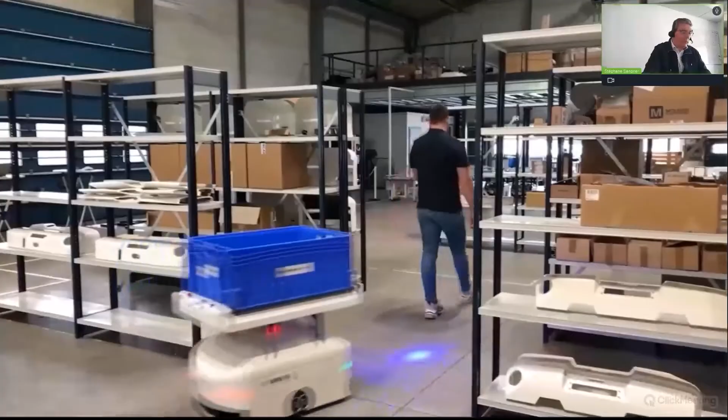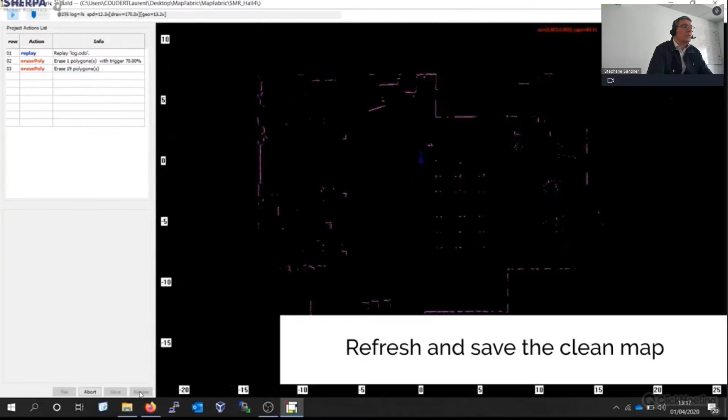The Sherpa field engineers, when starting any installation at the customer site, begin the mapping with the follow-me mode. As you saw in the video at the beginning, the operator just took the robot with him, picking it up and bringing it to any operation, driving it through the aisles to record the map. Based on scanners on the robots, we can easily capture the surroundings of the customer.

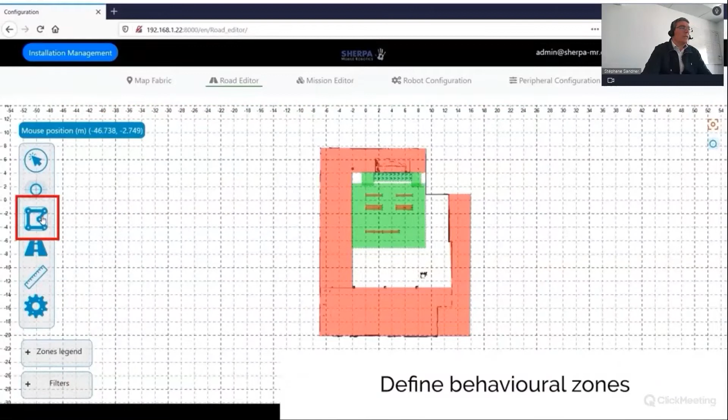After that, with very easy tools, the customer can program his routes and zones where he allows the automatic mobile robots to move and drive. Here, for example, everything in green shows exactly where we allow the robot to drive. In red, we drag in zones where the robot is not allowed to drive, where we forbid it. So everything is on very easy graphical tools - just pick any kind of module or icon, draw it, and put in all the behavior you'd like to give your installation. It's very easy to use.

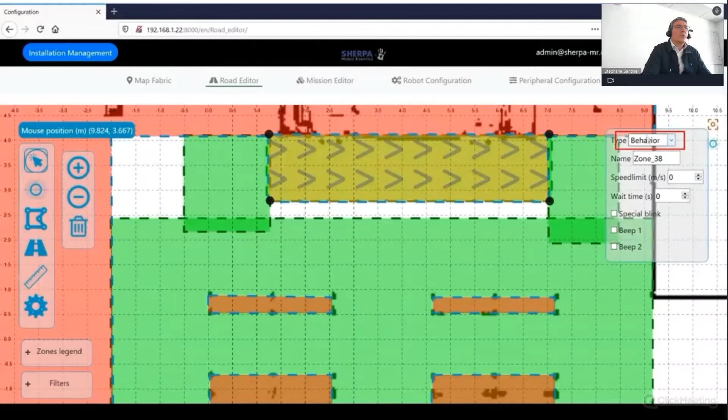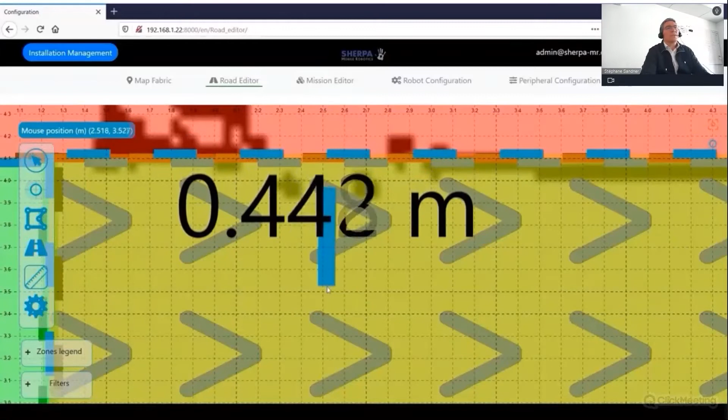There is no program line to code. Everything is done in a graphical mode. So the customer doesn't need to have very good, very well trained experts in robotics or in software development to drive or to set up any installation. We also have measuring tools, and at the end, the road editor also gives some possibilities to put pick and drop points so the robot can follow and reach any destination in autonomous mode.

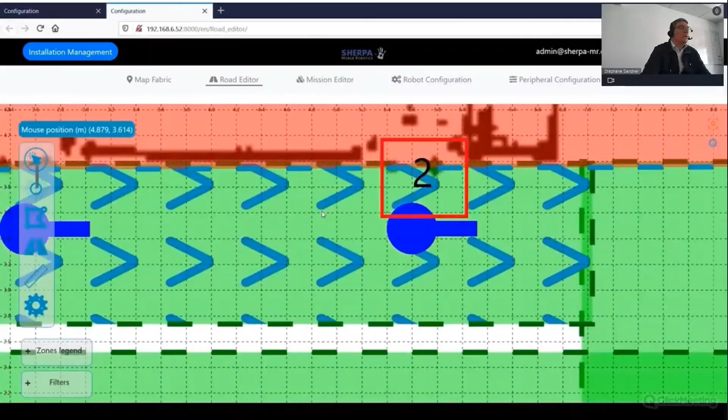The same easy drag and drop system will be used, in fact, to program the mission. So there is no need to set up any code line to program an installation. You just drag and drop the modules. You configure the roadmap before any mission and any pick and drop missions.

So the follow me mode and the full autonomous driving mode are standard functions on all Sherpa robots. The combination of both helps companies to reduce pain, but also to increase productivity. The following video will show a real application in an engine manufacturing facility in northeast France. We will show you with five simple interactions between humans and robots how this cooperation is driven.

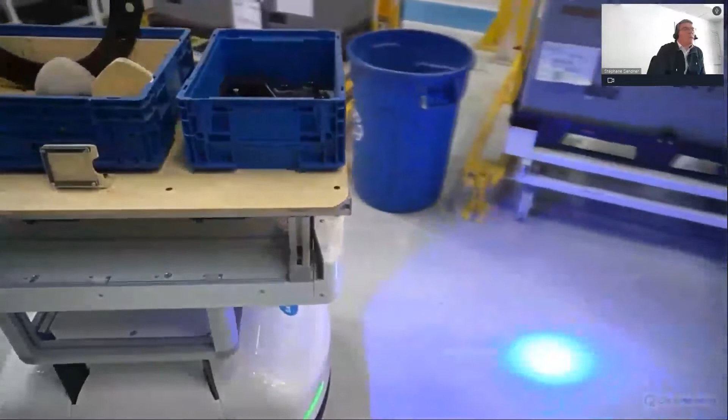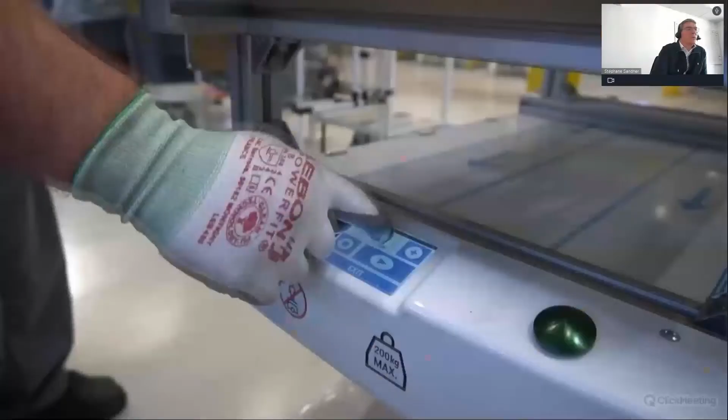So first of all, the worker picks up all his parts based on the follow me mode. So the robot follows him. He has a certain list of parts to pick in order to prepare the kit that will be sent later on to the assembly line. After this has been done, the robot drives to the final kitting station, where the operator also uses the robot as a workbench to finish the process and to prepare the parts that will be ready to be assembled on the borderline. The third component is the full cooperation between operators on the assembly line and the robot itself.

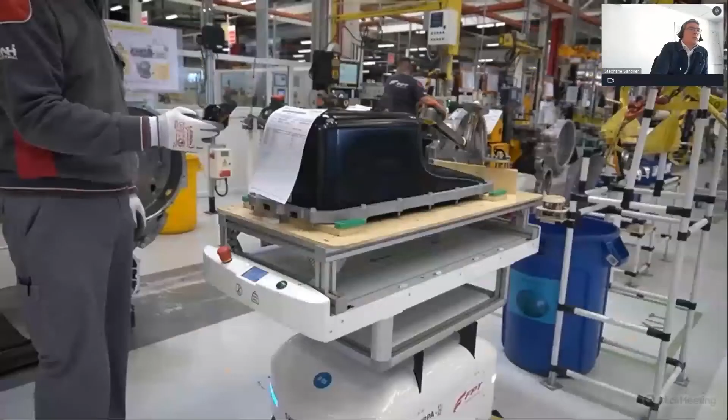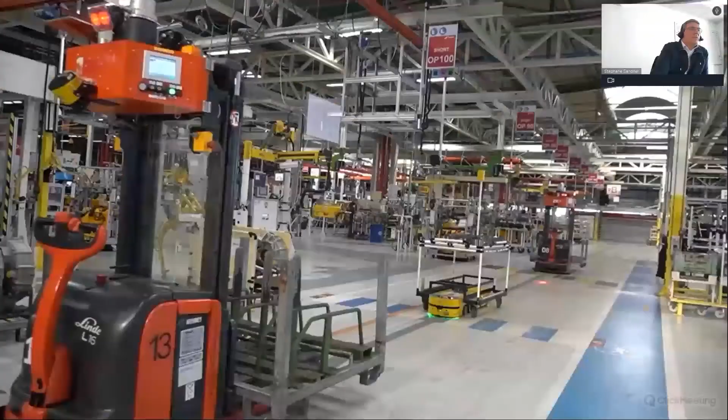So the fourth function is the cooperation between robots and other robots on the line. So we have full communication with other automated guided vehicles driving in this system. So we have here the example of full cooperation and collaboration between humans and machines, as well as other driving vehicles.

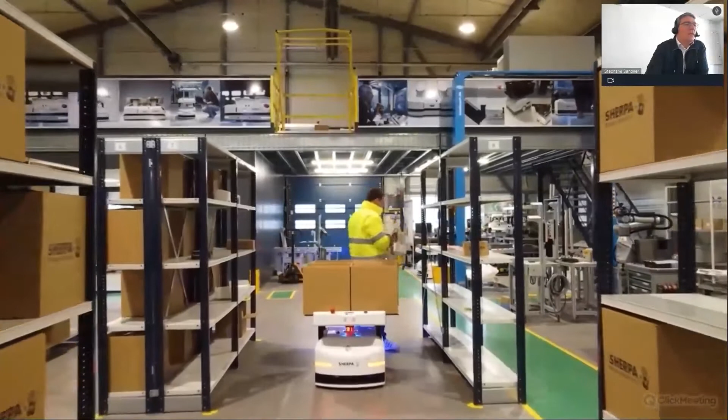This was an example in the production lines, but our mobile robots also find a high acceptance in distribution logistics and in solutions for order preparation applications in warehouses for B2B and B2C operations. Through an agile interface with the customer WMS, our smart picking solution guides the operator and our mobile robots. Whether they both should do a common picking in follow me mode, or whether the operator has finished the picking in his own alley, he can send the robot to another alley, or the WMS automatically sends the robot to another alley to finish the picking or to consolidate some orders. This is all done by the same robot.

So here we are in follow me mode, but later on we are also able to send the robot in full automatic to another station or to another operator. Here we have the Sherpa B for unit picking. We also have the Sherpa P for pallets. These robots find high acceptance in distribution for B2B. So as well as the Sherpa B, the Sherpa P is following the operator very smoothly, who can prepare his pallet and put the parts on the pallet. Whether he's driving in one direction or the other, the robot is always following him.

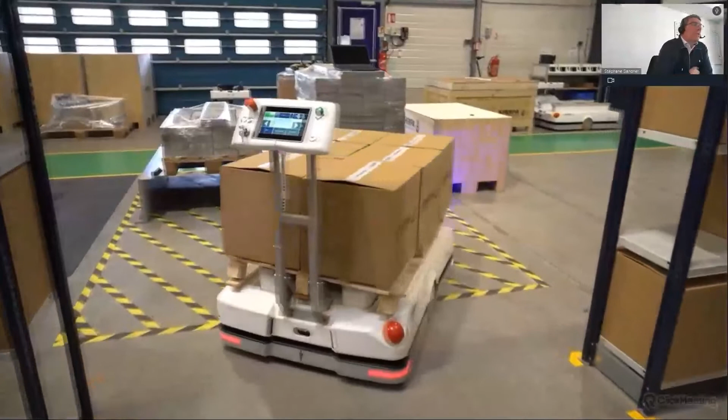Once his operation is complete, he can choose to send it to any packing station, consolidation station or parking station where the pallet will be stored and picked up by another operator, picked up by another robot, or just dropped in front of a stretching or foiling installation.

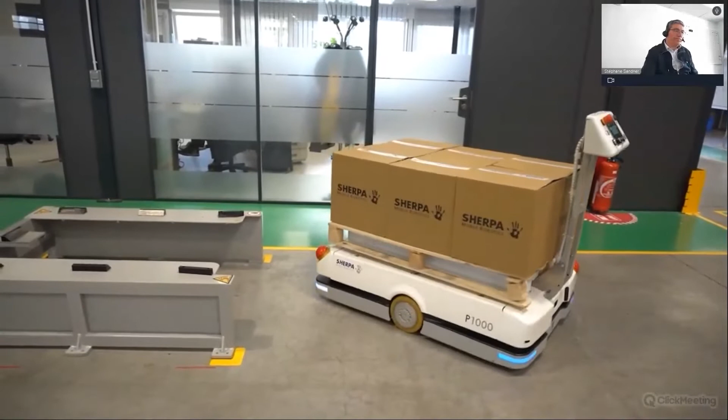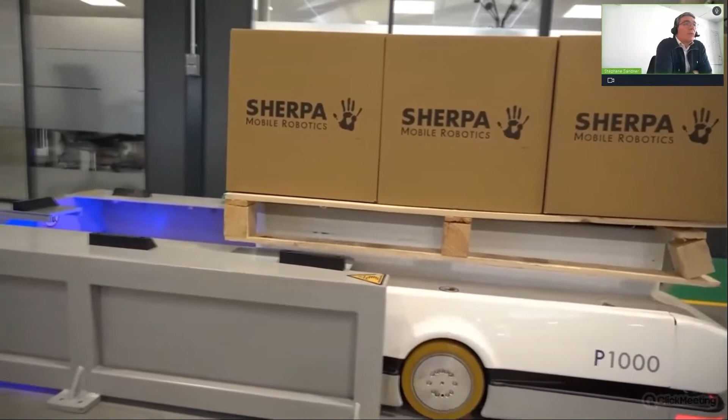Through a powerful energy management and energy package we have on our robot, developed, by the way, in close cooperation with our host today, thanks to them again, we can deploy large fleets and very competitive solutions due to a high level of availability.

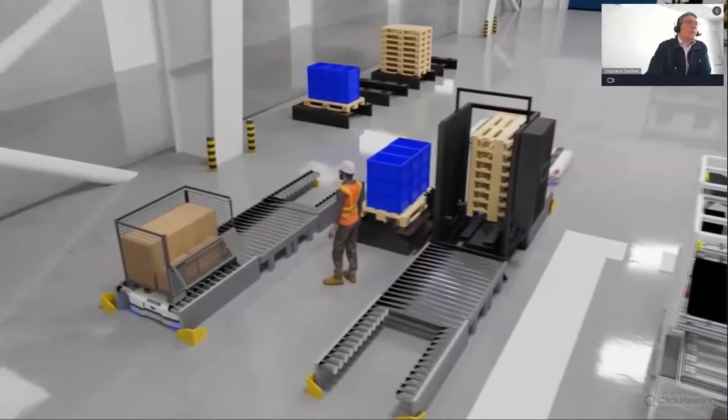The palletizing solution we will see here goes exactly the same way as what we are developing. These large fleets allow us to complete, in this case, a palletizing solution, and whether the palletizer is a human or a six-axis robot in full automatic, the Sherpa will have the same cooperation function in each case. So we are bringing pallets, goods, and boxes together in one position, and the Sherpa just keeps the sequence in order to bring all these parts to the picker and also to take them away.

Okay, just give me a second. I need to pick up my presentation again. Okay.

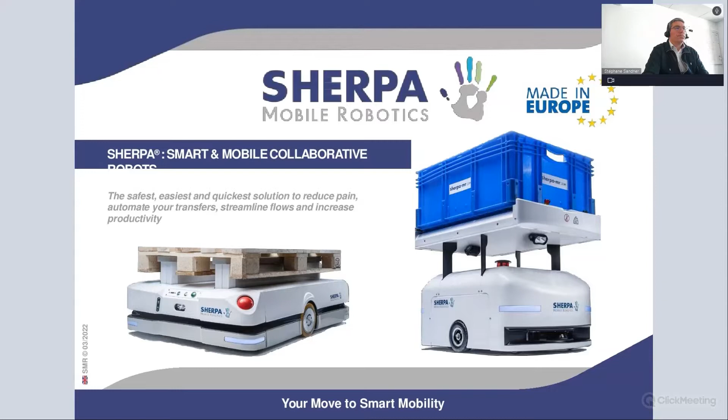So to complete all these collaborative modes, Sherpa proposes a complete portfolio of mobile robots with numerous standard and certified tops. Whether they are to be integrated in production facilities or warehouses, they are fully operational when leaving our facility. The ISO 3691-4 compliance is validated on each specific robot, and CE certification is delivered by Sherpa.

Again, through the powerful energy management, Sherpa is also proud to allow integrators to set up a specific top on the automatic mobile robot's rolling base. You can see it here on a picture, for example, a cobot or any more complex conveyor system on a Sherpa B, where we have a maximum load of 1,000 kilos.

So the fast opportunity battery charging we have in our portfolio, developed by Wiferion, and we are very proud to be part of this cooperation, helps us to enhance the availability of the robot using medium to high consuming tops.

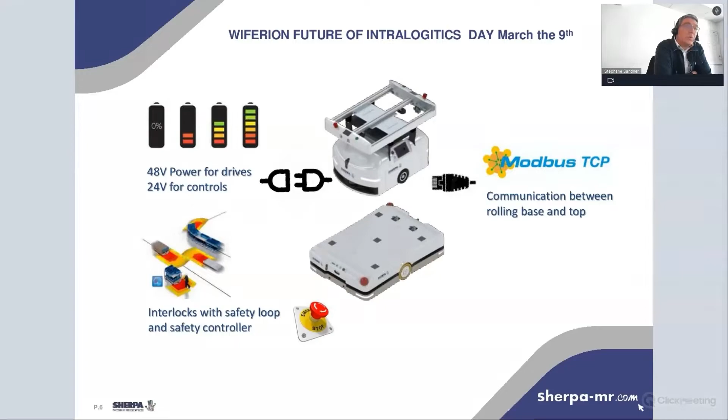Stefan, thank you so much. And to everyone out there, hopefully my microphone is now in a better position than before and you can hear me clearly. Yeah, so thanks again. Very interesting, very great pictures. It's always good to see videos showing that things are already in place and not only prototypes or ideas.

We are also very happy to have a close partnership with you guys. We are also very close friends in Freiburg, where Wiferion is located. So let's keep this up. I'm quite sure, Andreas, it's the first time that you have seen Sherpa, as you mentioned. So maybe you have some questions.

How is it? Yeah. Let's talk a little bit about the follow me mode you referred to. I would like to know, why did you decide to have a follow me mode instead of an operator following the actual AGV or AMR? I think it was in the early stage. In fact, the idea was born in 2015, and Sherpa is out of a company called Norcan, which is very specialized in building picking carts for big customers in e-commerce.

And this customer came to Sherpa and said, hey, why do you provide us so many picking carts, and why couldn't you make them move, so the person does not need to push them? And then came this idea to say, okay, why not do a robot that follows the people, so the human is still the master of where he wants to go, and the robot is just a stupid guy who follows. Very good. Thanks for that, Stefan.

And in this context, Magazino developed the robot Soto, which you can see here. I'll just share a quick video. Just a second.

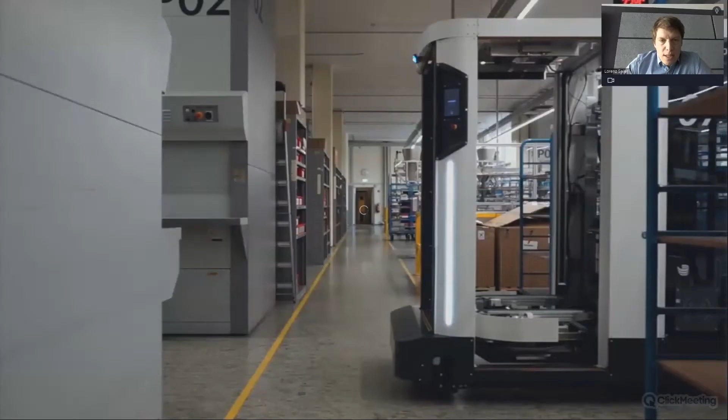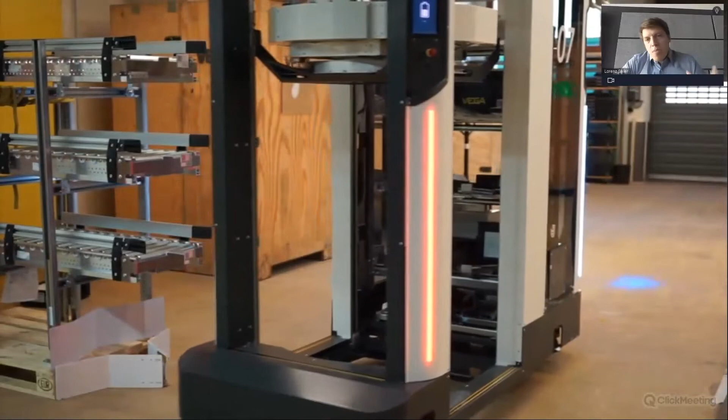Where you can see Soto at one of our pilot customers. Here you can see Soto navigating in the industrial environment. We're navigating with a SLAM algorithm. And then we are docking to a conveyor, which is at the automatic warehouse. We are picking up the boxes, putting all boxes inside of our robot with a capacity of up to 24 boxes. Then we are navigating to the assembly line.

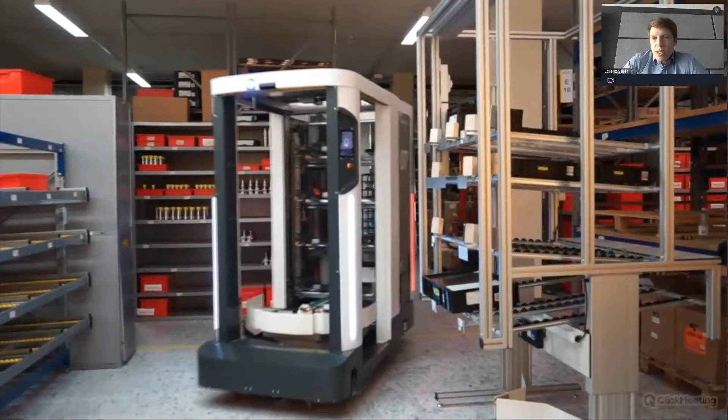And depending on the transport order, there might be several assembly stations where we are going to put down the boxes. We are docking to shelves. Then we grip the box again and put it into the existing shelves or flow racks directly at the assembly line, where on the other side the worker is standing and doing some assembly jobs. And as it's mostly a Kanban process, we can directly pick up the empty boxes again.

From the gripping system, you can see here, we are going underneath the box, we lift it, and then we have conveyors to bring the box inside of our gripper, and then we put it inside our storage. And then the robot moves to the next shelf. So let me go back to the presentation.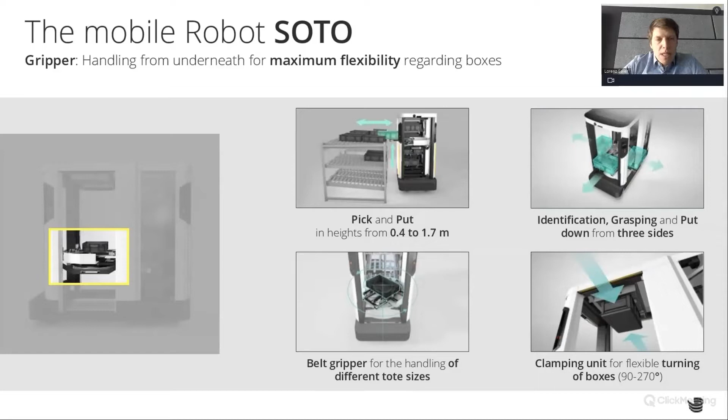We have belt grippers which can adjust automatically to the different sizes of the boxes. And on top of the robot, there is a clamp for the boxes. So imagine you have a bigger box, 400 times 600, and this box should be delivered to a worker in a certain orientation for ergonomic gripping. Then we can clamp this box on top of our gripper. The gripper rotates underneath, and then it picks it up again to deliver the box as it has to be on the assembly line.

On the drive base, we are using omnidirectional drives. So we do not distinguish between driving forward, backward, sideward, in order to have maximum maneuverability. The minimum aisle width we can drive in is 1.65 meters. And we have 3 safety scanners to ensure safe operation next to employees.

And additionally, as our robot is also rather high, and, as the classical industrial example, a forklift is parking there with a fork at 0.5 meter height, we can still see this kind of obstacle by having a 3D camera in the front and in the back of the robot. If you only have the laser scanners on the floor, you wouldn't be able to see obstacles like that.

So furthermore, I'd like to focus on our internal storage, or we call it the backpack. This works like a flow rack, which can tilt to both sides, depending whether we are putting down a box inside the backpack or we are picking it up.

So we always have 2 boxes behind each other within the backpack, and have here in the picture 4 layers, but in total we can have up to 6 layers in order to have a maximum capacity of 24 totes in the robot. From the totes themselves, we can handle the VDA standard sizes from 300 times 200 up to 600 times 400, and the weight is limited to 20 kilos.

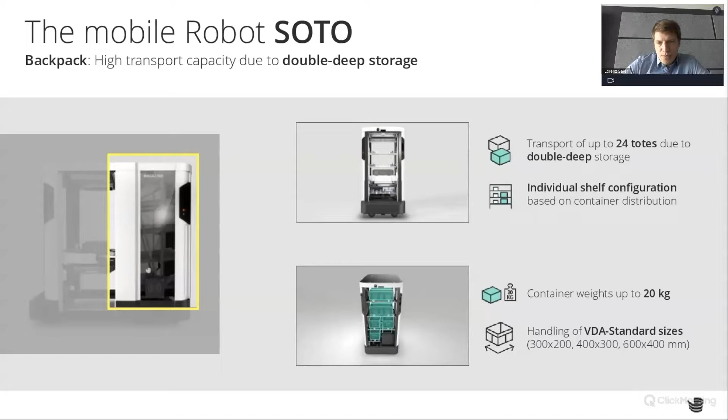For interaction or interfaces, you've seen in the video the conveyors. So classically, we pick up at automatic warehouses where the boxes are coming out on a conveyor. There we pick the boxes up. Or we have a supermarket where we have flow racks, where you can also pick the boxes up and put them down. It's possible here to use existing shelves. What we need is a kind of a simple sheet metal adapter to ensure that the box is coming out in the front a little bit, so that we can grip the box with our belt grippers from underneath.

And on the right-hand side, you can see what we have planned for the next year, or what is still in development, is an interaction between Soto and the tugger train. So if you think about automotive industries, the distances are very far, and it doesn't make sense to have a complex robot like Soto driving all the way. Here's the concept of a shared supply. So a tugger train or any other kind of AGV solution is transporting a huge number of boxes along the huge distance, and then Soto is doing the fine handling or the last mile to bring the boxes completely into the assembly line shelves.

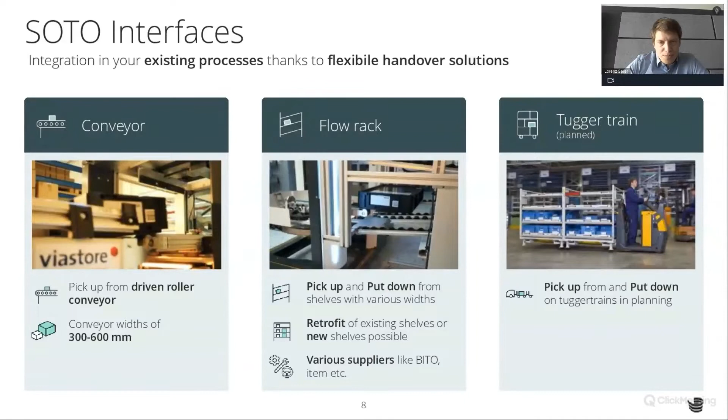On the process side, the process for Soto usually looks like this. There's a transport order coming from ERP or WMS system. Soto is driving to the warehouse or supermarket where the boxes are supplied on conveyors or in shelves. Soto is loading all the boxes within its order, then navigating through the assembly line and putting down the boxes directly into the shelves where the worker can pick them up. And in the meantime, when putting down a box, Soto can directly also pick up another box or an empty box to be returned to an empty station, and then the cycle begins anew.

Yeah, to come to the challenges we have seen in the beginning. So with the solution Soto, it's possible to have a complete end-to-end solution for the tote handling, or especially for kind of replacing tugger train operations. So if we have a look on the logistics, it's possible to deliver only 1 box, so you have more space available. You can have a just-in-time delivery, and you have a smooth delivery and a constant delivery. On the saving side, if we compare to a tugger train operation, you can reduce the operational costs by up to 60%. And Soto, of course, can work 24/7.

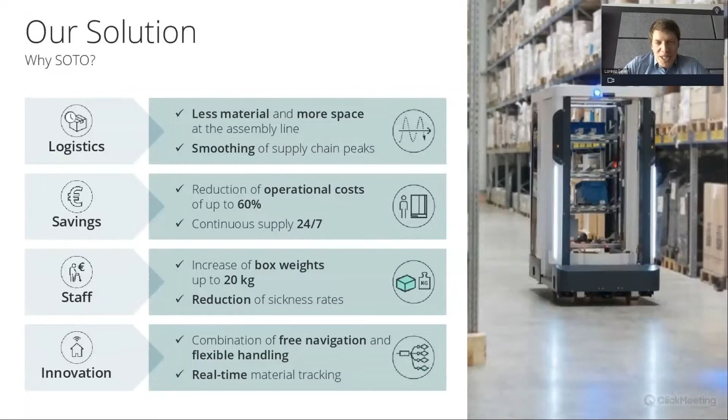Yeah, so that's it from my side. I hope I could give you an overview, and I hope, Andreas, that you now know which one is the Toro and which one is the Soto of our robots. Thank you very much.

Thanks, Lorenz, for bringing transparency in who is Soto, who is Toro. Appreciate that, and I hope I finally can remember which robot does what.

But maybe also a couple of questions in regards to the Soto. Where do we actually have the possibility to see the Soto in action? So if there's someone interested, are there applications that you can actually show, or is it something where you say, yeah, come to Munich, come to our environment, and we show it in our test environment? What's the procedure? Yeah, so for sure, you can always come to Munich. We have a demo room where you can see the robot running.

But Soto is also running in some pilot projects, for example, at ZF Friedrichshafen or at the sensor manufacturer close to Freiburg in the Black Forest, Vega Grieshaber, where Soto is running in the pilot projects and where you can see it in an industrial environment, which I think is always more exciting and more challenging also for the robot.

Agree on that one. Maybe also grabbing a question from the chat, and also my personal question. I remember I've asked someone else from Magazino before. Why did you come up with the name Soto and Toro? Was it some Japanese stuff or something like that? I don't remember exactly, but maybe you can enlighten us on that one to cut off the topic of the naming. Similar to you, I only know this has something to do with, I think, a Japanese translation for gripping or something like that. That's Soto, but I do not know for sure, but the naming has something to do with some Japanese vocabulary. I'm not familiar exactly. Okay, Lorenz, let's put it this way. If you take part in the Future of Intralogistics Day 2 in autumn, we're gonna find that answer hopefully. So let's see.

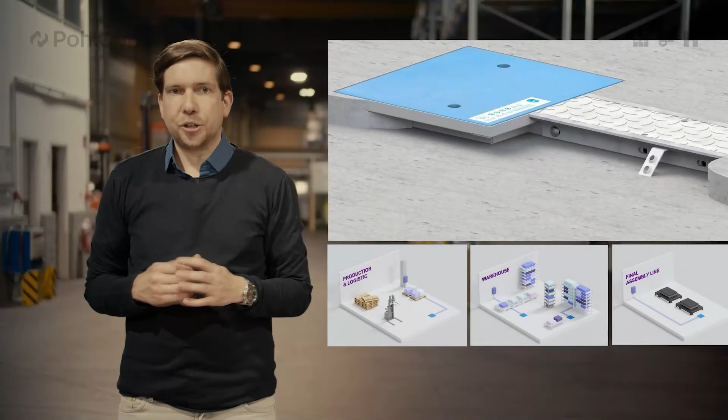Our solution is the Wireless Charging Protection System, or short WCPS. It offers tremendous benefits and closes the planning gap between efficient fleet utilization, efficient energy supply, and the need for a process-integrated charging strategy.

The idea is quite simple: charging the robot during the day as a part of the process increases the productivity of the whole fleet with a reasonable number of robots. The main advantages of our solution are that the WCPS system is integrated seamlessly into the ground and is fully harmonized with Wiferion's Etalink 3000 in order to allow opportunity charging.

It is suitable for all kinds of production and logistic areas. It leads to maximal flexible space utilization with no blocked areas. Different vehicles can share the same charging spot. Vehicles can also drive over it.

No bypass routes or risk of trip hazards, and optimal protection of the high-tech charging electronics and cable. Following the concept of in-process charging, WCPS and Etalink is a perfect combination for modern material handling environments.

When planning an automation project with AGVs or AMRs, you should consider the charging management in an early phase. Following the idea of an embedded in-process charging approach, we strongly recommend to plan with a wireless charging technology and our WCPS infrastructure product, in order to exploit the full potential of your fleet's productivity and to increase the overall flexibility of your automation project.

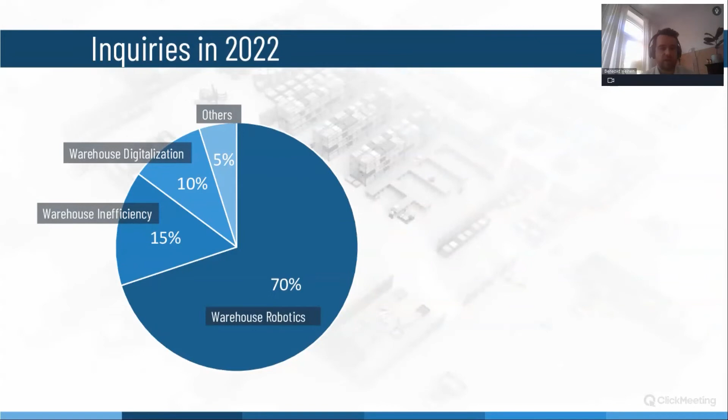And if we go a bit more into detail now, you see that half of these requests are not digitalized at all. That means these customers do not have a connection to an upper ERP or WMS system. And for these customers, the first step into efficiency gains would be the AMR or AGV.

So what we also see within those inquiries is that 80% of them are looking for just an isolated solution, transport from A to B. So, for example, a transport from a production source to a defined position in the warehouse. And this is really simple because the potential customers understood that a connection to the WMS system could be a complexity which most of them could not fulfill.

Now I would like to share some use cases from our warehouse execution system. And the first use case is a typical use case of implementing an AMR in a simple process from A to B. So at this customer, we have a production belt where a new finished good pallet is ready to collect, and we are connected to that conveyor belt. So we know that there is a pallet, and then we are searching with a stocking strategy for a free empty spot in the warehouse.

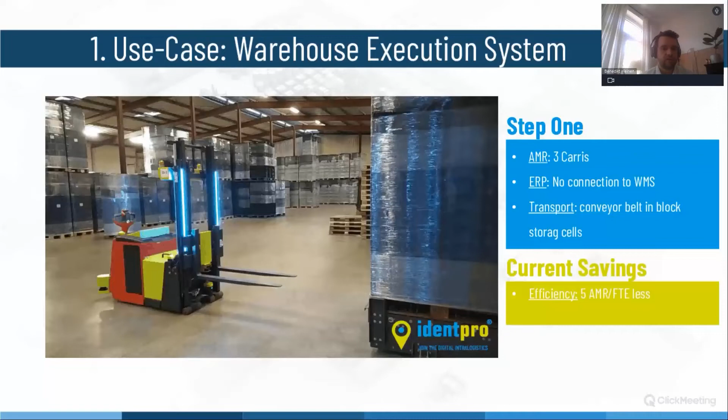So the unload position is in a block storage cell. So that means we decide where the pallet has to be placed and stored. So we create a transport order and give that transport order to that LGV. So when you see a short video now, you will see that the AMR picked up that pallet. He has to relift it because he has to make sure that the heaviest point of the pallet is close to the end of the forks. And now the vehicle is on the way to that block storage cell and unloads the pallet at the final destination.

So what we have in this use case now, we implemented 3 AMRs in a 24/7 scenario. And for sure that makes sense for the customer because their scope was to eliminate all manual work in that process. And we were able within that project to reduce 5 to 6 workers. That brings a return on investment of 1.5 years for the customer. So it was easy to calculate.

So now I would like to explain our AMR, which we provide. So we have different types with also different payloads and lift heights. In that picture, you see the vehicle Linde L16 AP. So basically, we buy these vehicles at Linde, but we do the assembly of different kinds of sensors on it. So we have localization with LiDAR, which brings the exact position of the vehicle. We also use this LiDAR technology when implementing on the manned fleet. So we see that in the next use case.

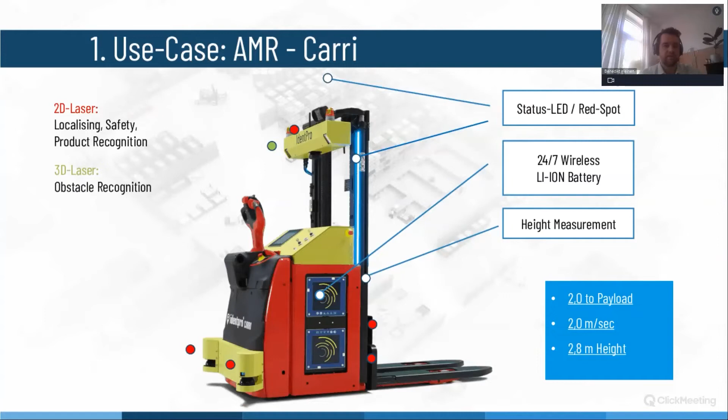Coming back to the title, no AGV or AMR without digitalizing the warehouse first. So sure, you can do this first step with a simple transport from A to B, but in the end, this customer was looking for a solution for how to move forward within that warehouse. He was looking for a solution to bring the pallets scan-free out of the warehouse, to load the trucks with the needed goods. And from our point of view, this is a logistical process which currently cannot be done robustly with robots in a 24/7 scenario. So this customer decided to do this with manual trucks.

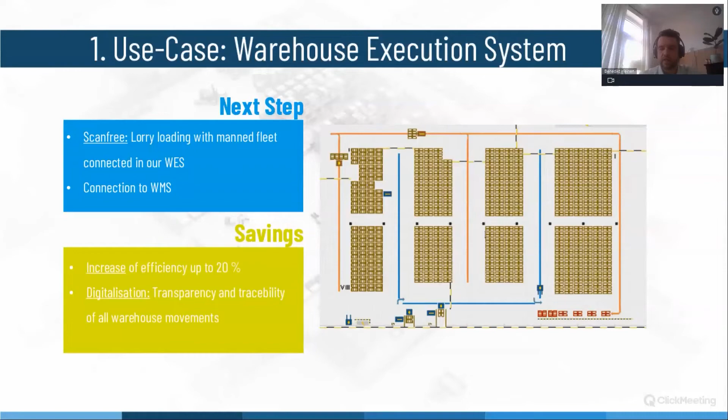That means normally if you use manual trucks to load these lorries, you need hand scanners to find and confirm the picked goods which are needed for the delivery list. And this is not really efficient, and this has a high failure potential. So what we did for that customer, we use our warehouse execution system for the manned fleet as well.

So we create a digital twin for each pallet, and we already did that in the first stage. So we have the exact XYZ coordinate where we unload the pallets in the block storage. And now we equipped the manned fleet with some sensors. So we also have the LiDAR sensor for the exact positioning. We have IoT sensors for the automatic load detection and height. We have a terminal which can communicate and address tasks to the driver.

And at the end, our warehouse execution system on the manned fleet has an automatic digital track and trace. So it is connected to the WMS system. And if we now get a transport order or delivery list, we address that to a driver and help him pick up the right goods. We map the right articles in our map, and so we make sure that the driver can do a scan-free loading of the truck without any mistakes. And that's all controlled by our warehouse execution system.

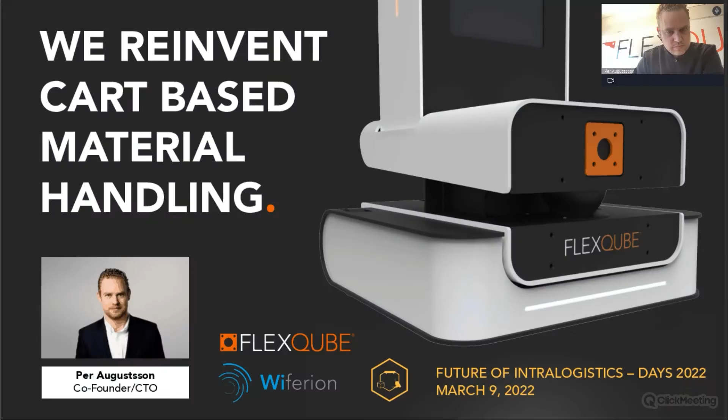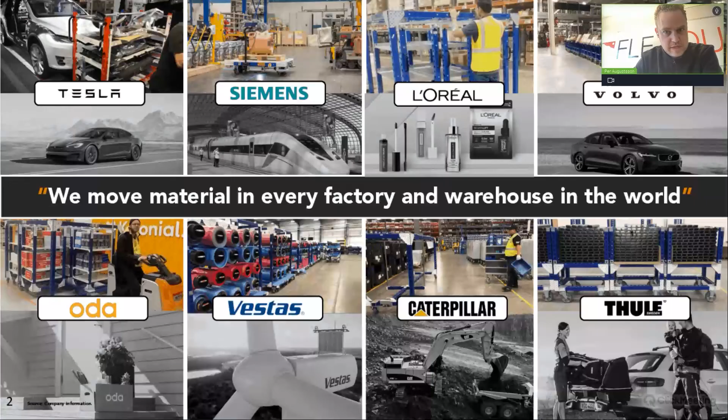So, welcome to this presentation about cart-based material handling. My name is Per, and I'm the CTO and co-founder of Flexqube. So today I will tell you about Flexqube, where we are coming from, and where we are heading with our new products. So what is Flexqube doing? We provide cart-based material handling. We have a wide range of customers, both in the United States and Europe. For example, our biggest customers are Tesla and Siemens. In the new Gigafactory in Berlin, most of the carts in operation there are provided by Flexqube.

Most of our sales is within manufacturing, but of course we see a very big increase in interest and requests also from e-commerce and warehouse business. So I will share a short video showing an introduction to our company.

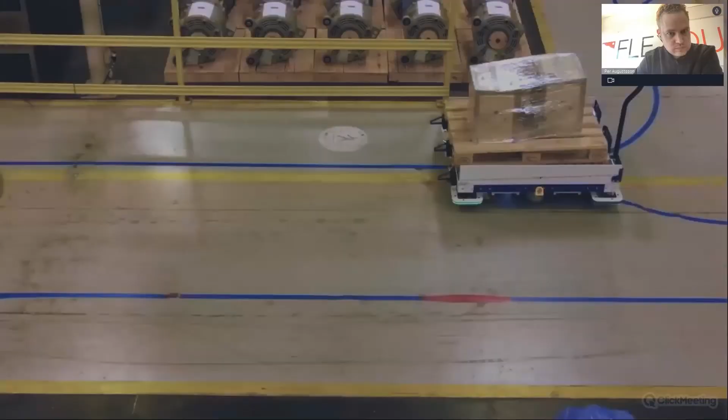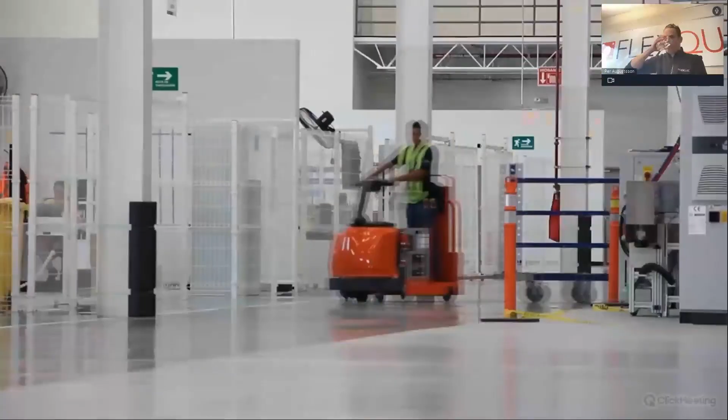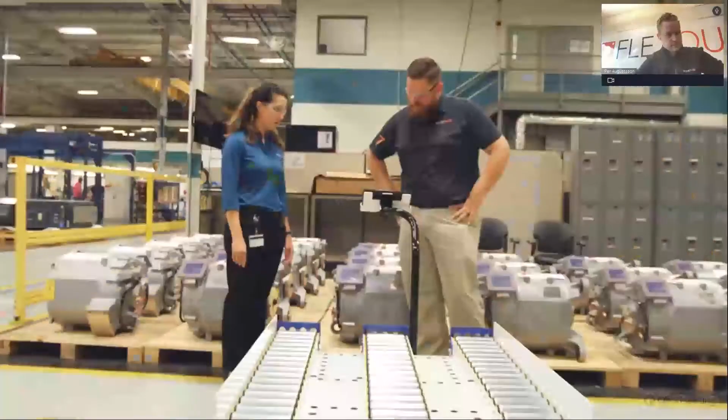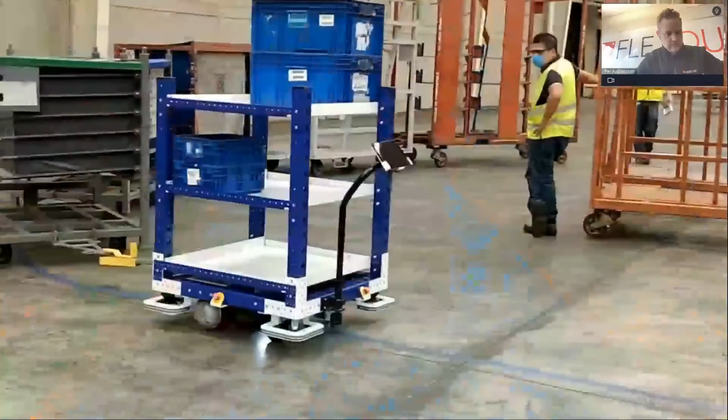Inspired by Lego, the founders from Gothenburg built Flexqube with the aim to make their customers world leaders in intralogistics with their flexible yet simple solution. Beginning with only the 3 founders in 2010, Flexqube has grown swiftly to now serve more than 850 customers in 35 countries. With the e-cart concept, Flexqube merges the mechanical building blocks with digital ones and can proudly state that Flexqube is now an automation company that offers state-of-the-art material handling carts. As the world of material handling transforms with robotic applications, Flexqube is ready to take the next step towards its vision of moving material in every warehouse and factory in the world.

Great. So I'm jumping back to the presentation.

So since the start of Flexqube, we have delivered more than 50,000 carts with 5,000 different configurations. And they are all configured and built with our patented and Lego-inspired building block concept. We have, at the moment, 2 main distribution centers, one here in Gothenburg, Sweden, and one in Duncan, United States.

We were listed on NASDAQ in 2017, and that was also the starting point for our transformation into a recognized robotics company. And I think if we look at the companies working with automation, Flexqube is unique in the sense that we have a very solid foundation in mechanical carts and a solid knowledge in intralogistics. So I think we can bring an interesting perspective into the automation business.

We have a strong growth. Growth is a strong focus for us, and our order intake in the last quarter increased by 159%, reaching $5.4 million. So what is actually driving the need for industrial carts? So we see 2 major trends.

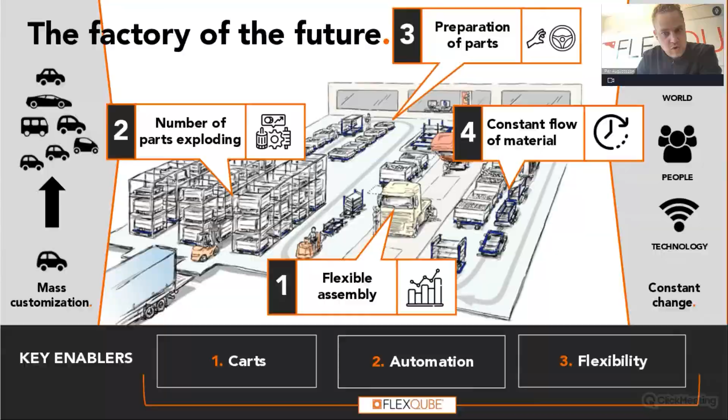So automation, as we all know, it is very hot and everyone is talking about it. But the truth is, when you visit factories, you realize that this transition has not even started. In most factories, you have forklifts, tugger trains, etc. to move the material. And there are also a lot of challenges connected to automation, especially within manufacturing.

So one first point is that when you move parts in a factory, the size and shape can vary a lot. So I put together some pictures from one of our customers making buses. And as you can see, we have made carts for tires, windshields, seats, and body panels. And they all have different sizes and shapes customized for these specific parts.

Moreover, in manufacturing, there are very tough requirements in terms of ergonomics, because at the end of the delivery, you have, in most cases, a human that will pick the parts and assemble them on a product. And that is a perspective that is truly unique for manufacturing, that you need to configure the ergonomics in a very efficient way.

Also, timing. The timing of delivery is extremely important, because if the delivery is late, you can potentially stop a complete assembly line. And I think this is unique compared to, for example, warehouse and e-commerce, which is more forgiving. If a transport is late, it is not as big a disaster as in manufacturing, where you actually will stop the complete assembly line.

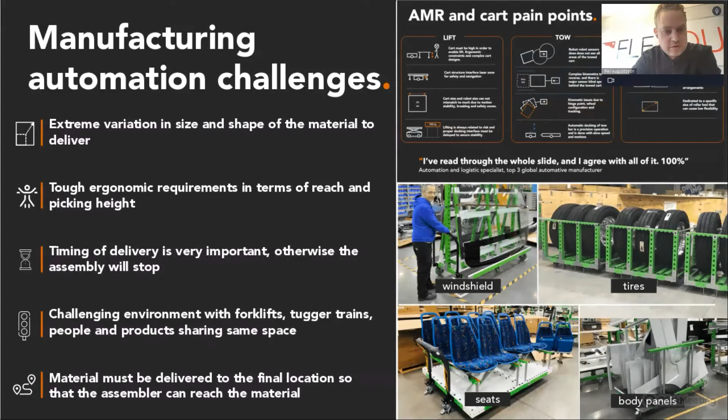So based on this, the challenges and also the trends that we see, we have a clear vision of the future that material in future factories will be moved with affordable, self-driving, safe and reconfigurable motorized carts that are tailor-made for specific use cases. So you have a couple of carts supplying seats, you have a couple of carts supplying windshields, for example. That is a way to really achieve high efficiency and flexibility.

And given the fact that the transports in factories are increasing, it's more or less a constant flow. And if we add to that we can expect a significant price reduction in automation, we believe that in the future we will reach at a certain point a scenario where it doesn't make sense to separate the cart and the robot. The higher the delivery frequency, the lower will the ratio be between the number of carts and number of AMRs. So our take is modular and reconfigurable motorized carts.

They can be configured to any size and shape. It's tailor-made for specific use cases. They are fully standalone, meaning that all pain points in relation to cart and AMR integration are removed. And they are also instantly available. So that is also important to consider, that you don't have any aspects of planning, picking up and dropping off the carts.

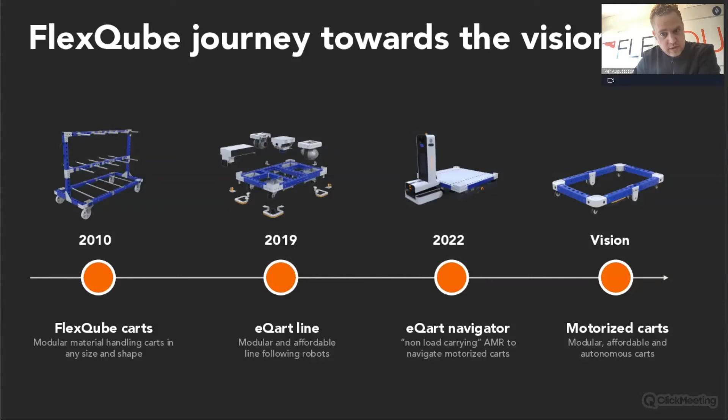In order to develop this product, we have teamed up with what we see as the very best technology providers. Of course, Wiferion, we have worked with them for a while now, and we are extremely happy with the system. So we use the charge pad and battery, and it gives us a lot of flexibility in the design. We use BlueBotics for navigation, and we have a bunch of SICK equipment to make sure we have the highest safety on board. So this enables us, as I said, a robust and reliable solution to go with established partners, but it also helps us to reduce the time to market.

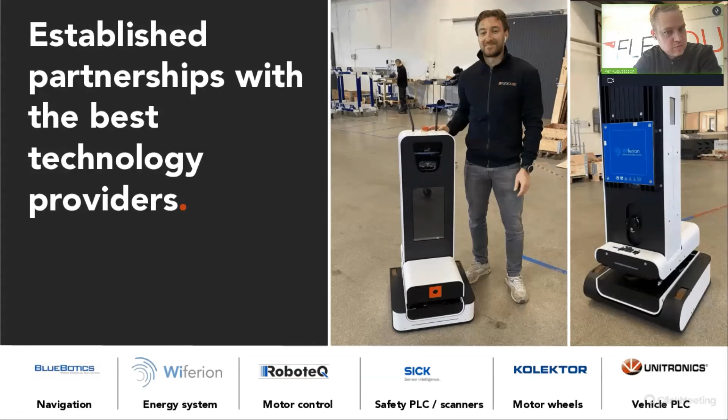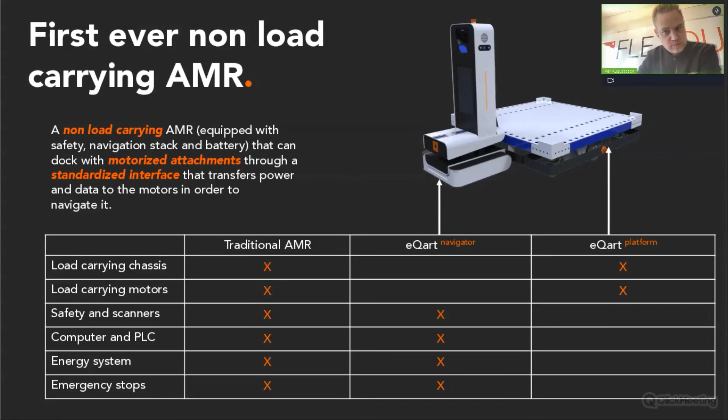And by creating a smart interface between those, we can create a beautiful system with an extremely high level of flexibility. So we can use one robot to move a lot of different platforms with different size and shape and function. And we are enabling this through a smart docking. Of course, we have a mechanical interface, and we actually use a docking interface that is also used on cobots. So that is a very proven method. In addition to this, we are also adding data and power.

And our inspiration in this comes from the cobot business, where for a long time there have been standardized interfaces. You can easily exchange tools on the robot arm in order to perform different use cases. And we want to create the same simplicity, the same level of standardization, and the same level of flexibility, but within the AMR business. We need to have some innovation when it comes to the interface between robot and carts, because today there is simply no standardization at all.

So I will switch over to the next video. I will need to stop first here. I will change.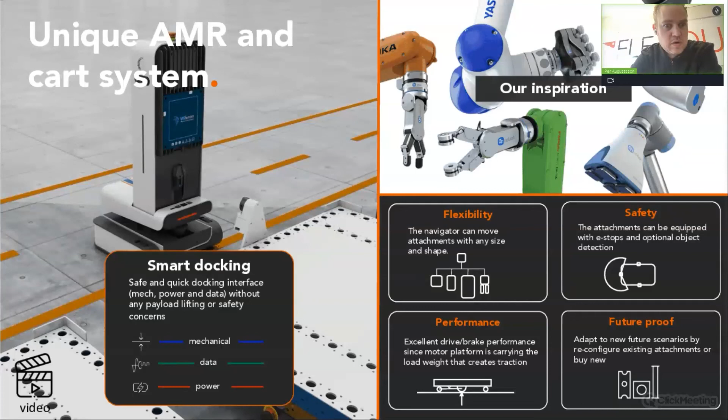Since we also have data and power in the smart docking, we have the opportunity to add e-stops, for example, on the motorized platform, adding a completely new level of safety. If you have a robot driving under a cart, the e-stops can potentially be hidden so they're not accessed. And you can also add additional safety scanners on the attachments.

From a customer perspective, this gives a unique level of flexibility, because you know you need one robot and you can basically create different attachments that are custom designed in order to move different material. So it gives a high level of flexibility. And when you have a changing need, you know you can always rely on the navigator, because that is a standardized robot with a standardized interface, and you can focus on adapting the attachments, because you know they will fit together.

Finally, I will show a real user case that we are working on at the moment. It is an automotive manufacturer that wants to get rid of forklifts and use robots to replenish racks with automotive seats. There is one picking location, and you have one buffer location. The replenishment rate is every 5 minutes, and the window to replenish is a maximum of 50 seconds. Otherwise, the assembly line risks stopping.

So I'm changing to the last video. We are using two navigators working together as a team, with motorized platforms with multi-directional wheels. One navigator will basically remove the empty rack, and when that rack is removed, his friend will go and move the rack to the picking location. Meanwhile, the other robot has picked up a full rack and will deliver that to the buffer location.

And I heard in previous discussion you talked about the chargers. In this case, you can see that we have a vertical location of the charging pad. It's also flexible in the means that you can simply place the charger anywhere as long as you have a power connector to that.

Great, so that was my last slide. I will open up the presentation again. Thank you.

There we are again. Thank you, Per, for the interesting presentation, which has also been the feedback from the crowd. So well done, I would say. Maybe a question from my side: you started nearly 12 years ago, back in 2010, and at this point of time, there was nothing regarding AGVs, AMR, or at least nothing that has been as big as it is today. Is that a benefit from your perspective, having this deep understanding of manual operations and how it has been before automated robots and all that stuff?

Yeah, I think that is a unique position for us, because we have really been focusing on what is creating value in terms of logistics, designing of the carts, designing of the flows, and everything like that. So I think it is very valuable for us that we have that history when entering the automation segment. And I think we felt, when we started to work with automation companies but didn't have automation ourselves, that it was extremely technology focused - okay, how fast does the robot go, what is the amp hours on the battery, how many horsepower are the motors. We want to turn this around to, okay, what really creates value for the customer. So I think that is our perspective entering the automation business.